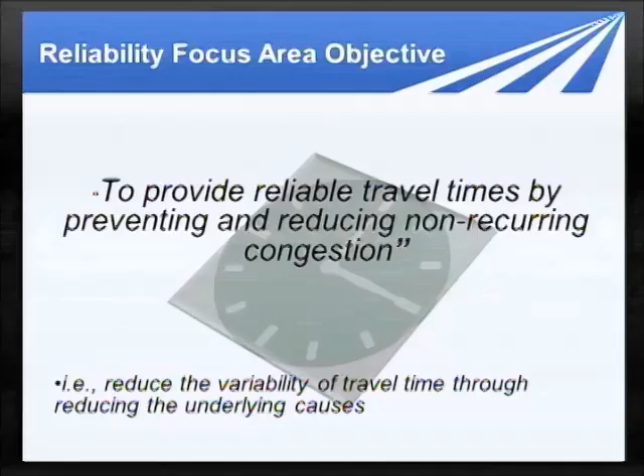And the renewal part of the program, which is rapid reconstruction—a lot of work zones that aren't planned as well as they might be—they generate non-recurring congestion. So all of these things feed in, and from a customer's point of view, they're all part of the same thing. I think that's eventually where we have to get with the implementation: these things aren't separate, they're all part of the same thing.

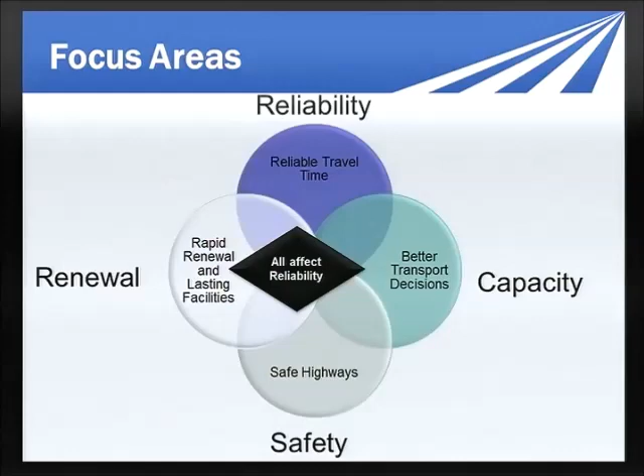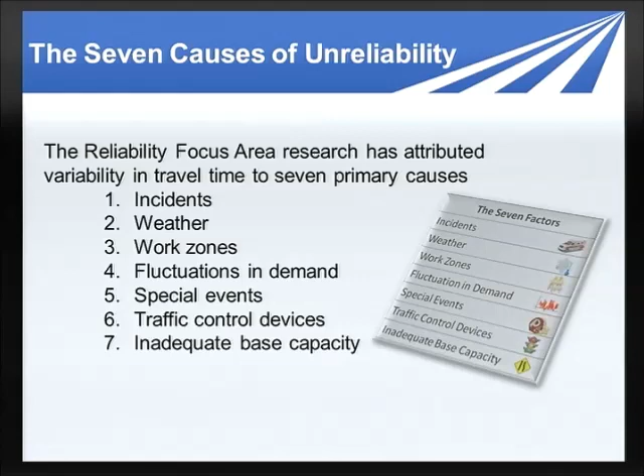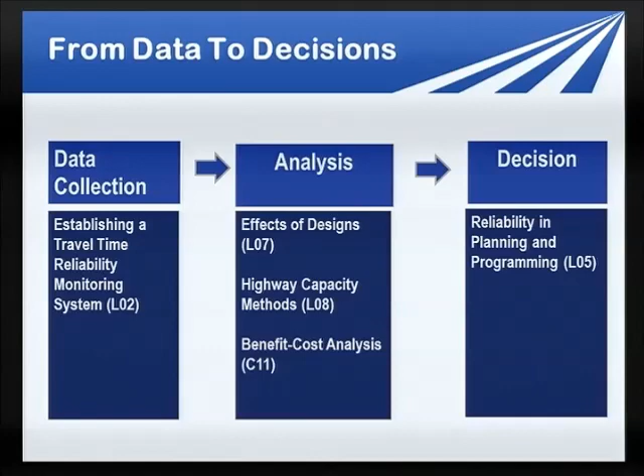And to do that, you've got to have some numbers. If you remember the 6 points from the capability maturity model this morning, number 3 was performance measures, which means a lot of things, but you've got to have some data to move in that direction. You need some analytical tools. You need decisions on which performance measures to select, and then you've got to get them in front of the decision makers. To put it crassly, you've got hard pavement solutions competing with operations solutions, and we're just trying to give the operations solutions a more level playing field.

These are the products that will be available. We'll cover these in a little more detail.

So the first project is establishing a travel time reliability monitoring system. I'm sure you all collect travel data or buy travel data, things of that type. But to do this work, you need to know when incidents were present. You need to know what the weather was like. You need to know if it was just a particularly high demand period. You basically have to analyze the causes of non-recurring congestion, and to do that, you have to operate with about a year's worth of data so you can see the variation.

The second project takes some foundational work. It's relatively light on user requirements, unless you test different solutions. So you might want to try a particular design treatment to improve travel time reliability. This provides you a tool to get an estimate of what might actually happen, and there's quite a number of combinations that you can look at.

The L08 project does a similar sort of thing, but it works in the highway capacity framework. That project, we added two chapters to the highway capacity manual that introduced reliability methods, and we upgraded the software, Freeval and Streetval, to include the reliability methods so you can test the impact of your design treatments on reliability using highway capacity. This is more complicated. You got to bring more to the table to use these methods, but they do have the advantage of the highway capacity seal of approval.

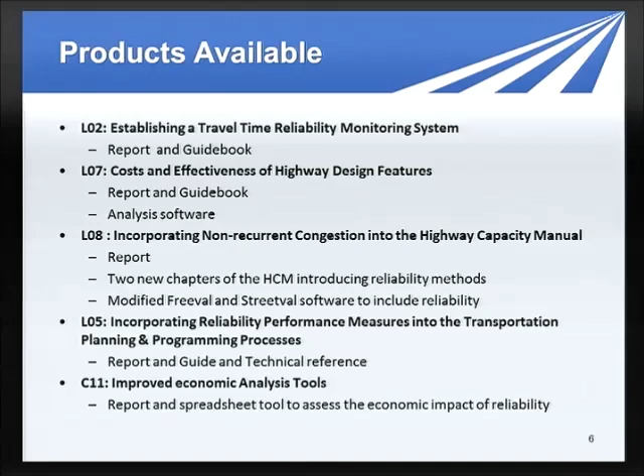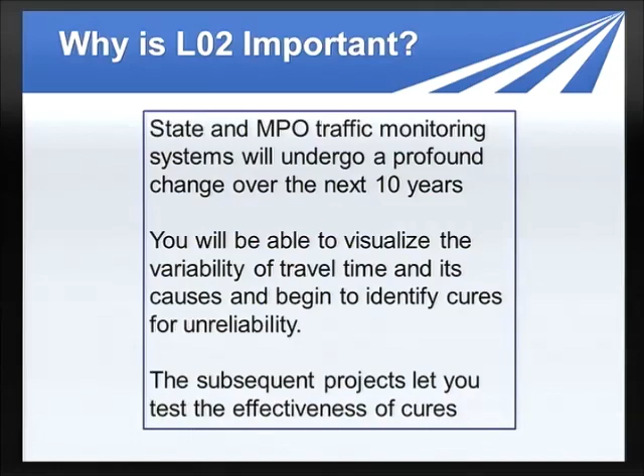So we'll talk briefly about the monitoring system. This is the one that lets you analyze what's causing your unreliable congestion or your unreliable travel times, how often it's happening. It has some visualization tools. There's a guidebook for doing this and a report. This is mostly methods. There's no software here, but this is methods. And so your TOC people and your data collection people, this gives you some tools to integrate travel data with the other kinds of data that you need.

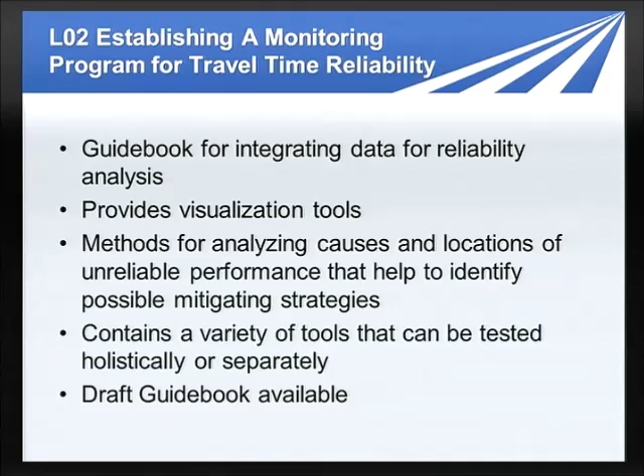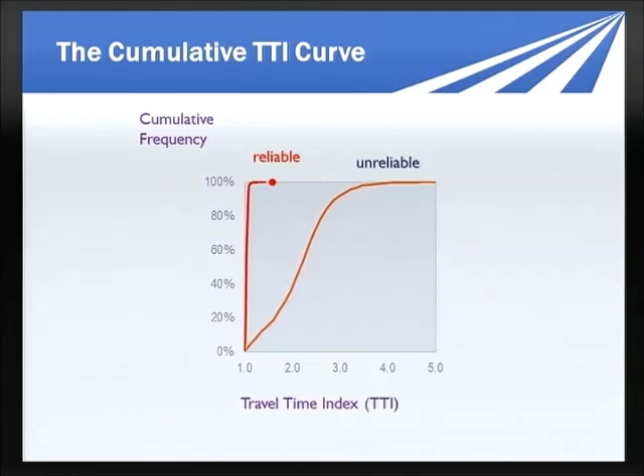Now this is the basic visual cumulative distribution function. Basically the travel time index, and there's a number of them, you pick the one you like, versus percent. And the more vertical that curve is, the more reliable, or the less variation there is in your travel time. So that's the basic principle. Comes up over and over again in the research, and it's relatively easy to calculate once you put the data collection process in place. But it ain't always that easy.

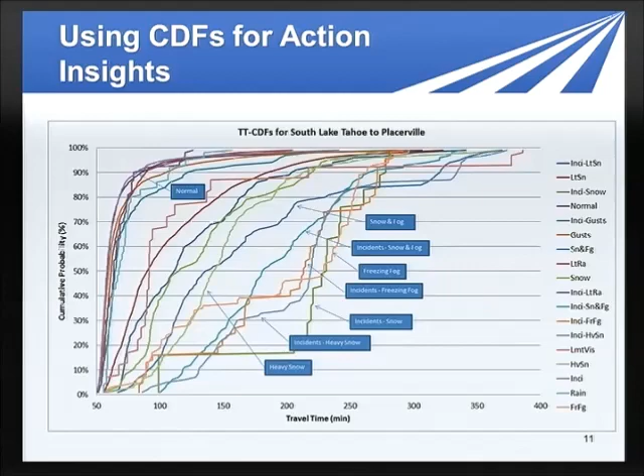This chart looks at all the host of things that can go wrong. It looks at weather situations, rain situations, snow, work zones in combination with bad weather, and then you've parsed out your data to have different curves for different situations. So then you start to get into the analysis of what's actually going on with your roadway system.

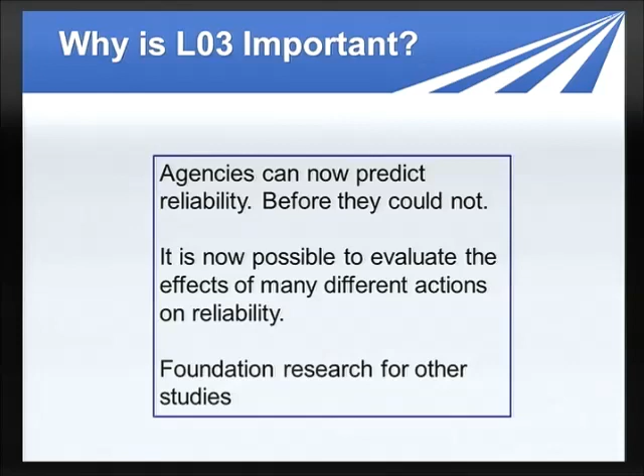This is a foundational project. This one doesn't get implemented per se, but it underlies just about everything else. This is the basis for doing the evaluation. And again, you see the—

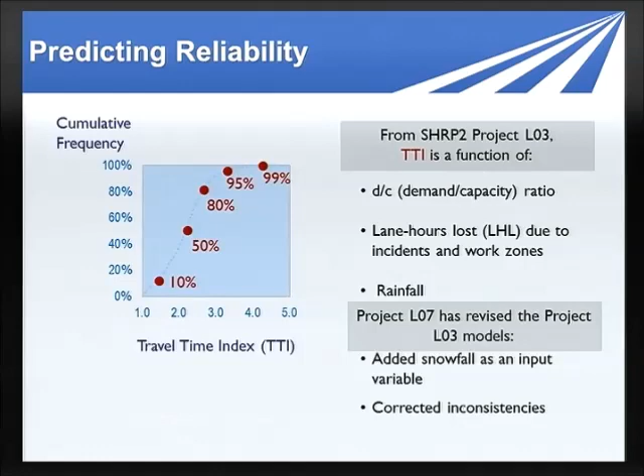So this is the analytical framework. This project worked out the equations and the numerical methods to do the analysis. And since we're engineers here, we like equations, I thought I'd give you a few.

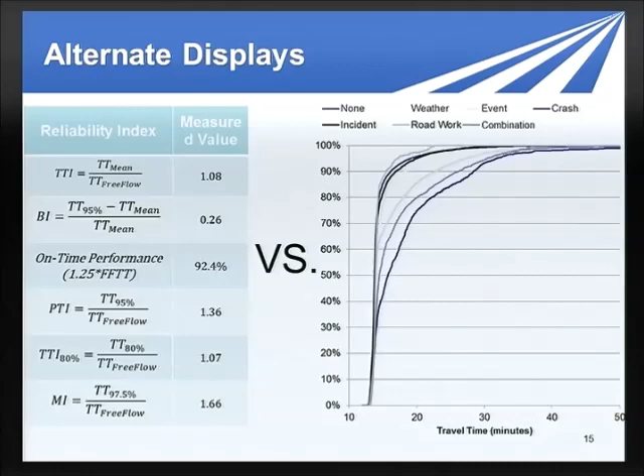There's a big debate in the literature on which one's better. It's going to be up to you, or maybe it will just sort of shake out, and as usual we'll all decide to do the same thing. But it's not there yet. They're all valid, they all work, but you got to pick one.

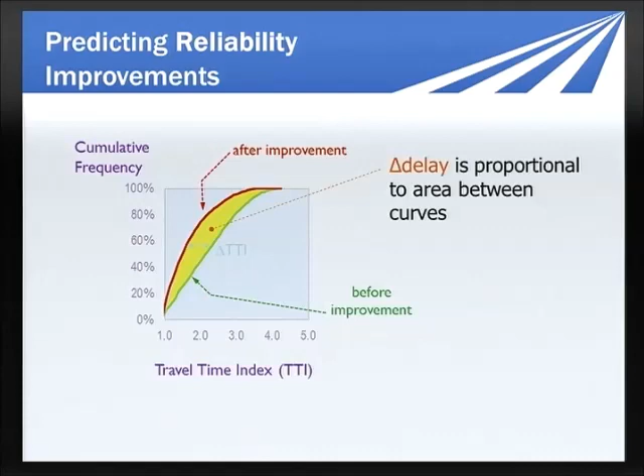And this is a nice feature: the curve on the right is the baseline condition, and the curve on the left is after you've made some improvements, and the area between is proportional to the change in delay. This is what the L07 project I'm going to talk about in a minute involves. You can feed in some relatively straightforward data, crank these things out, and use sketch planning to see what's sensitive to your situation and what doesn't help.

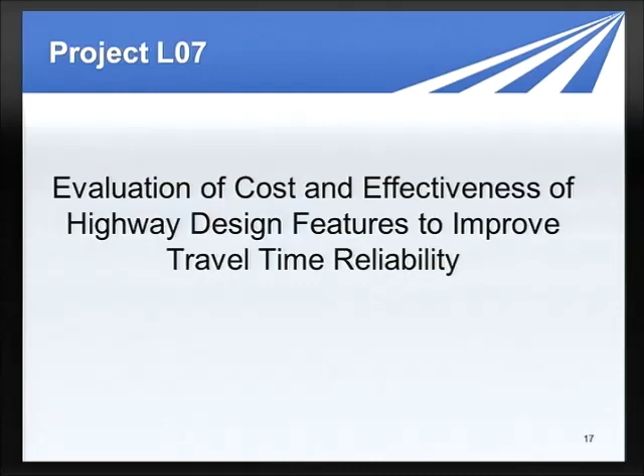So this project takes the things I've just talked about, the travel time data and the analytical methods, and makes them operational. This is an actual tool which is available now. You can get it off the TRB website, and soon it will be available through AASHTO and Federal Highway Administration. There'll be a new and improved version coming out before we're done — it's always important to have a new and improved version. But this demonstrates the feasibility and desirability of doing different design treatments.

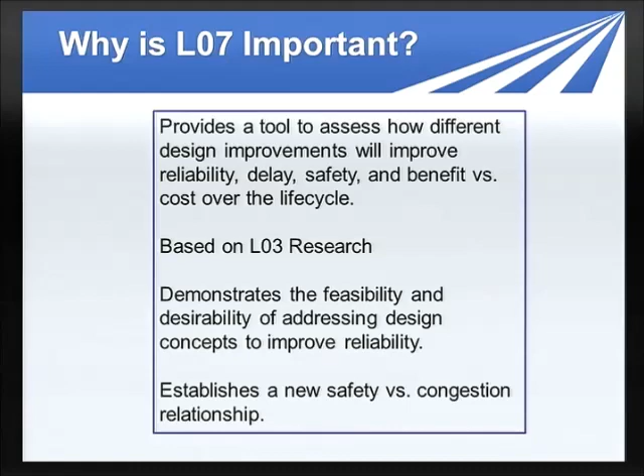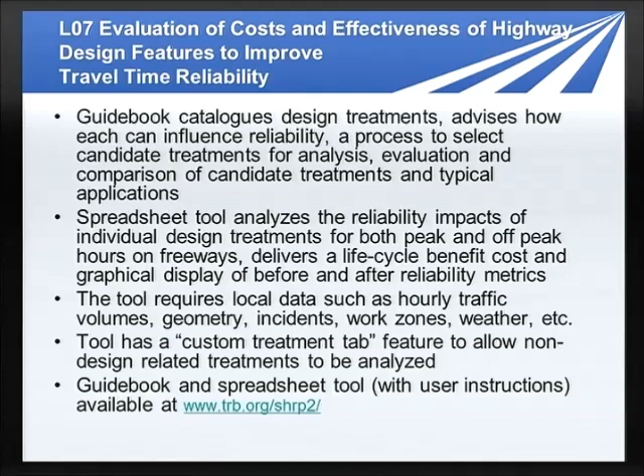Some of them might not do any good, some of them might be great — you don't know. So you've got a guidebook that catalogs the kinds of design treatments you might want to look at, a spreadsheet format to enter the data, and it takes relatively simple things you're likely to have: hourly traffic volumes, geometry, incidents. It's not too esoteric on the input side.

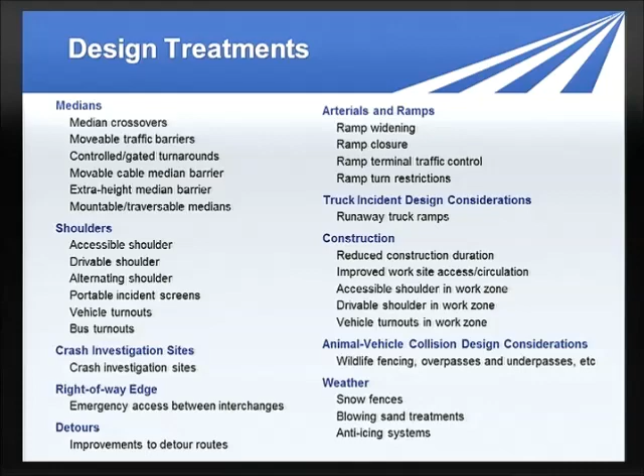These are the kind of design treatments you can look at, and these are all things I'm sure you're thinking about every day. You size up a situation and say, well, we might want to do this, we might want to do that. This gives you a sketch planning tool to take it a little bit farther and plug in your data, or use default data if that's the best way to go about it for you, and you can test these kinds of things.

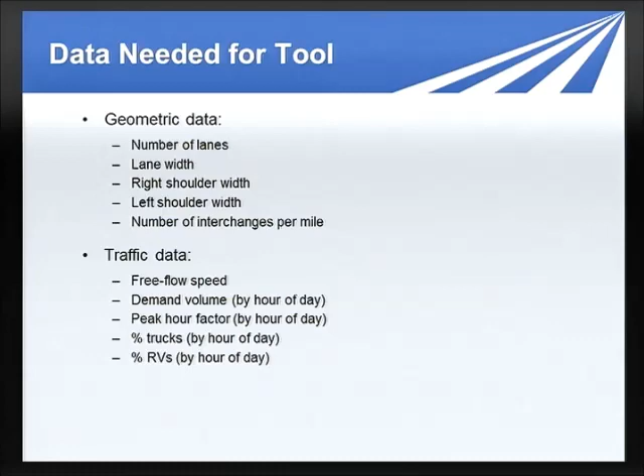This is a little easier to see — these are the kind of things you need to run it, shown on the second screen there. And again, if you don't have certain of these things, you can still use it — there's default values. And there's a screenshot of that.

That's the sort of thing you'd be looking at — you'd be entering your data, getting these kind of outputs, and then you see our cumulative distribution curves. As you try different things, those curves are going to move around, and so you can visually get a sense of what has a big impact and what doesn't. You can look at combinations. We've done some pilot testing, and the pilot test agencies like this product.

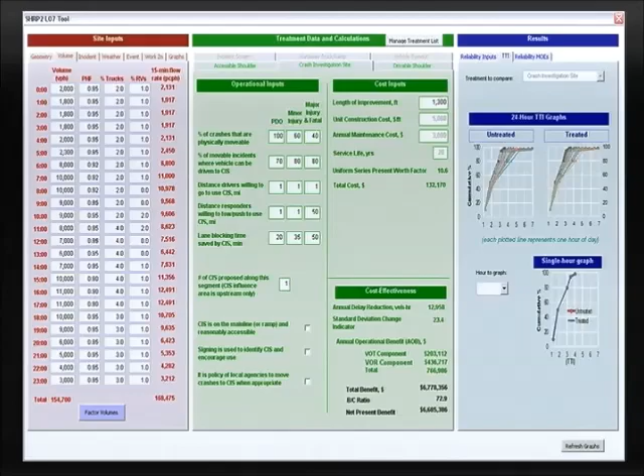Now this is the one that involves the Highway Capacity Manual methods, and again, as I said earlier, there are 2 new chapters. And you should know that the National Cooperative Highway Research Program at TRB has a project to take this work, and some other work done by Federal Highway Administration, and come up with a new version of the Highway Capacity Manual, which will be out in a year and a half. It will include reliability methods, so they're in the book at this point — not necessarily easier, but they're in the book.

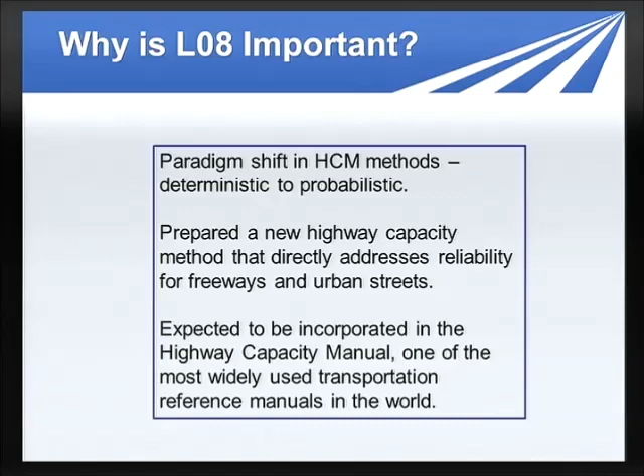I think I already covered these things — there's an arterial streets version and a freeway version. This is just a quick summary of the freeway methodology. It has a scenario generator in front of it. There's almost an infinite number of combinations of congestion, work zones, weather, time of day, month, year — lots and lots of combinations. So you put a scenario generator to come up with a set of conditions that you then run through the Highway Capacity Manual method with the reliability component, and you get your performance measures out the back end.

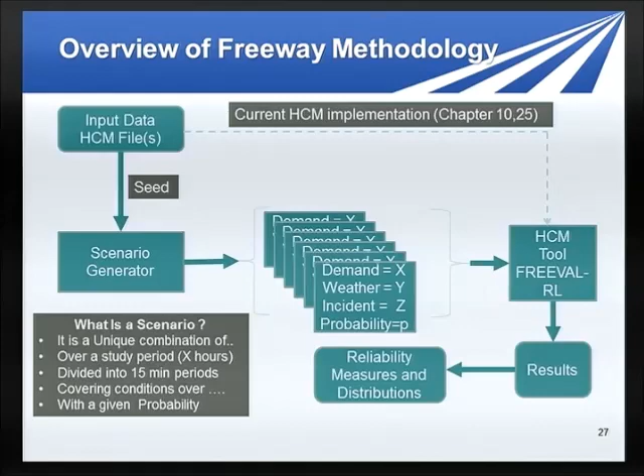So this, again, has the advantage that you're in the Highway Capacity Manual tradition. And then this is the urban streets method, which again looks at work zones, weather, incidents, effects of operation, signalization, and that sort of thing. So you can work the arterial street side with the StreetVal piece of software, and you also have the manual methods in the new chapters.

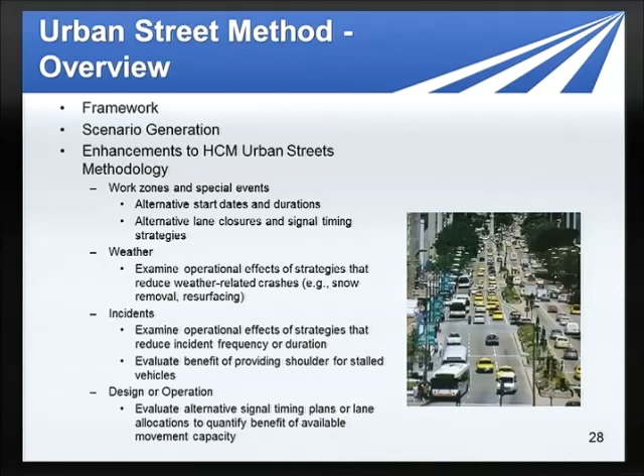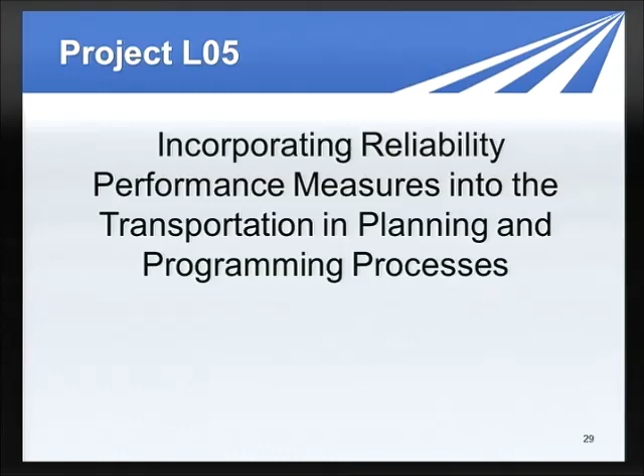So this is the nut of it, getting reliability performance measures into the planning process. As was mentioned this morning, the planning process is largely a capital improvement program. Quite often operations is not considered as part of capital improvements. The funding sources may come through other streams, yet it amounts to achieving the same purpose, which is improving customer service on the highways.

I should mention that this project was conceived long before MAP 21 was written, so this doesn't play directly into the MAP 21 performance measures, and of course we don't even know what they are yet. But this does some thinking on how to bring whatever performance measures you choose into the system.

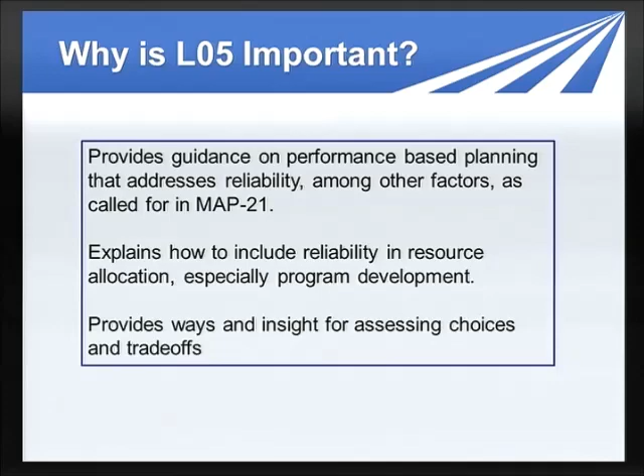So the products here are a report, a guidebook, and a technical reference document. There's some analytical work from other SHRP 2 projects brought into this document. There were some case studies done, particularly within the project, and at the end I'll mention some case studies done outside of the project. The idea being, how does this play?

When you put reliability measures in front of your MPO board or the Transportation Commission, or whoever's making the decisions in your state, what do they think about it? What kind of questions do they ask?

Do they believe it? Because a point I like to make is when you add reliability, you're adding a new value. You've been making road improvements for years, right? And you're taking advantage of reduction in safety issues and better travel times.

Well, this reliability, the public clearly cares about it. It's showing up in what people are willing to pay for tolls, and we have HOT lanes in Washington, and they advertise it as a more reliable way to get around. If you pay the tolls, it's more reliable.

But, well, again, as you're creating additional value, this is another thing that puts an item in the numerator of your benefit cost equation. So there's value out there that you have not been taking advantage of.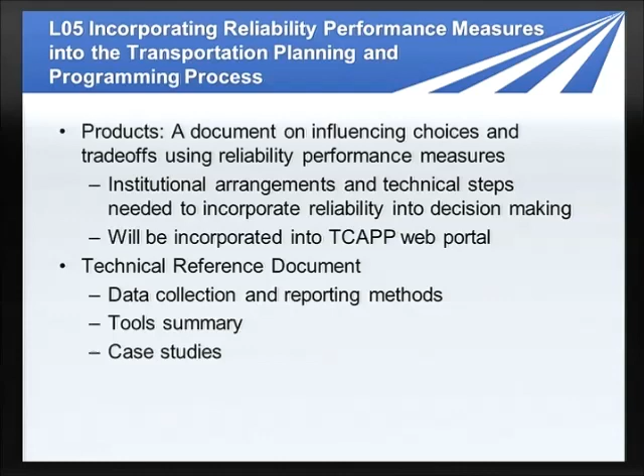Okay, that's good. We're analysts. We think it's good. But do the decision makers buy it? So that's what the pilot tests were all about.

And this is sort of how L05 links in. Clearly, you go from the data to the evaluation strategies to summarizing the program and then prioritizing projects. So this is another way of saying what I started out earlier. There's a flow to these projects. They work in tandem.

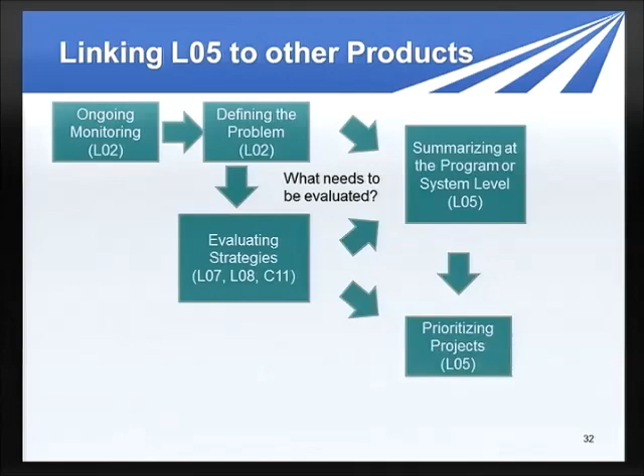And then this is a shot from the report on steps to do this. Number one is really important, is getting operations into your policy statement. Get it in at the very high level so people are thinking about it. Selecting performance measures is also pretty important.

Like I said earlier, you're going to have to pick. But you got to get this on the table at the philosophical level, and then at the practical level, you're going to pick a measure and pick one that you're going to be able to calculate.

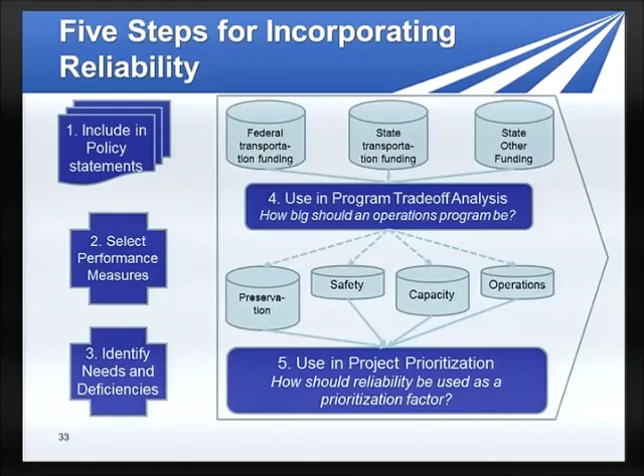And if your organization doesn't have a year's worth of data to do this analysis, you have to go to some other approaches, or you may have to think about putting a data assembly and integration program in place. And of course that's going to cost some money. So these are all decisions that need to get made as you start to move down this path of bringing operations into the capital programming process. And I mentioned earlier the economic benefits are another value that you can add.

And here's another screenshot from the report. Basically, you're adding user benefits. You have your direct user benefits. This constitutes an indirect user benefit, which accrues to the land values in the area affected by the improved travel time reliability. And this went back and used some of the data that was collected in the C03 research that I mentioned earlier.

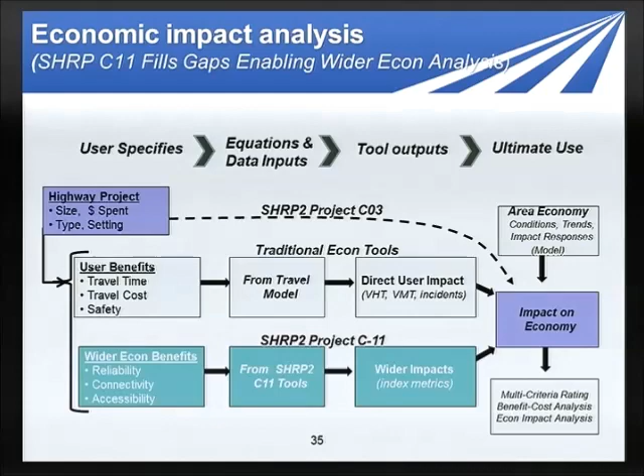It popped up again in an operational tool here in this program. We did some pilots. We'd done these analytical tools, and of course our contractors told us they worked great. And most of them did, but we thought we'd better go out and kick the tires a little bit. So you can see the 4 sites in different environments that we used, and we worked with Florida International University to do some of the pilot tests here in Florida.

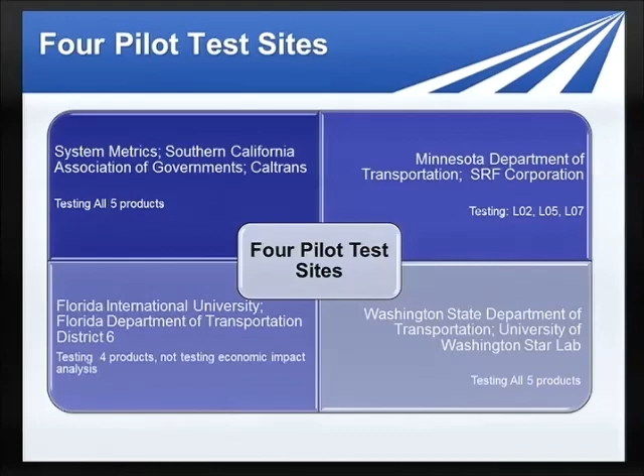And these are general findings. Each one of those 4 projects has a long report, which is really quite interesting reading. Overall the feeling was pretty positive about these tools, but they're not perfect. They had some warts. There's some things that needed to be fixed.

We did a fairly good-sized workshop last November in which we brought the pilots in before our governing board, and we went through all this. Then we came up with a list of fixes and modified their contracts to make some fixes so these things would work better. A lot of it was just to make it easier, like you do a scenario, be able to save that scenario, input, output. A lot of the things you just don't do when you're on the first cut in developing a research type product. So we went through one round of improvements, based on the workshop last fall.

It was agreed that the L07 and the C11 projects were the easiest to use. They took the least training and the least background work. L08 is the most sophisticated of the projects. It has a lot more levers that you can pull. The interface is pretty friendly, but you really have to get your head into it to use L08. And then people liked the framework from L05. They found that valuable.

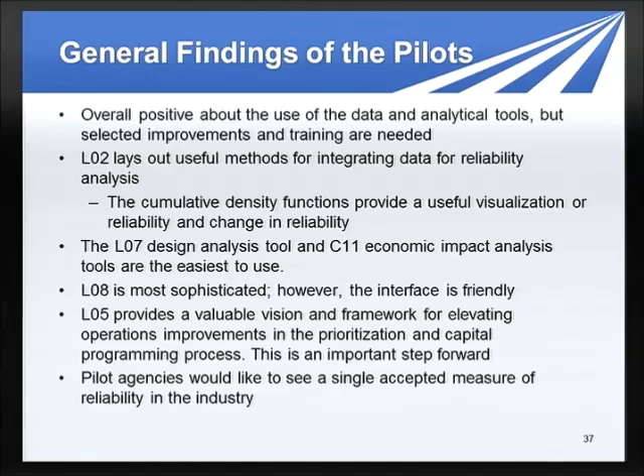Again, the pilot agencies, like everybody else, would like to see a single measure accepted for what reliability is, but unfortunately it's not our job to do that.

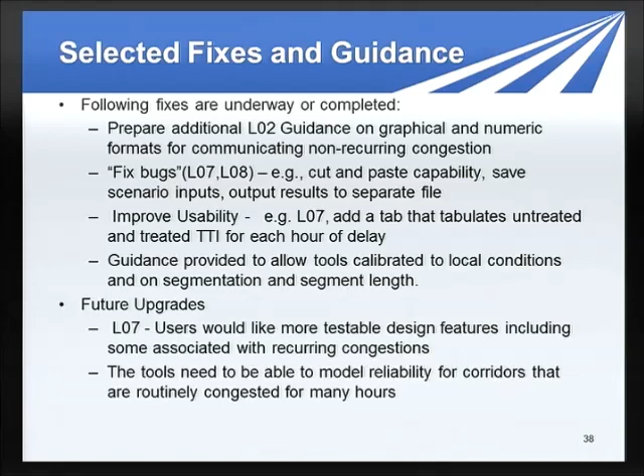So these were some of the fixes: we wanted a little more guidance on the use of the L02 document for integrating the various kinds of data. Like I mentioned, we fixed some bugs, cut and paste functions, things like that, improved the usability, and gave a little more guidance on using the tools. There's some future upgrades that we're not going to be able to get around to, but there's some ideas for next steps. And like any product, as these become accepted, they'll change continually, and I think that's a good thing.